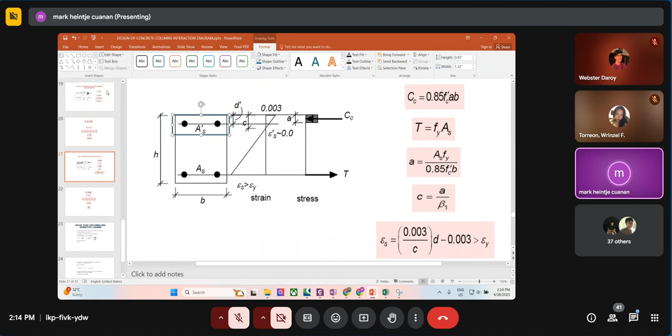So let us now proceed to the shear capacity or design for shear for our column. The design for shear in columns, this discussion will be short, because the design for shear in columns is the same as in beams.

If you analyze a beam, do you solve for the Vu? The Vu you use is actually the Vu measured from the d-distance, from the maximum shear strength. If you still remember, in the shear diagram of the beam, this is the shear at the support.

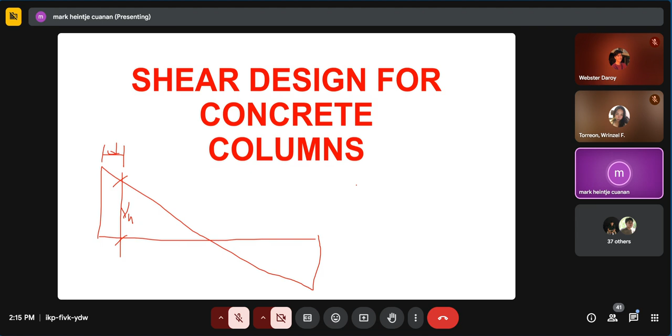So it's actually easier for columns. The same formula applies: the shear capacity Vu is simply the reduction factor times the shear provided by the concrete, plus the shear provided by our lateral reinforcement.

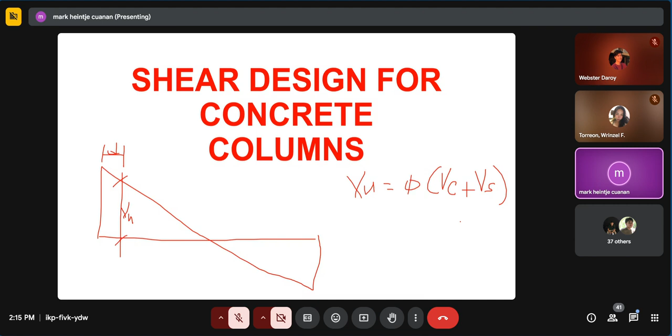So here I am going to discuss a sample problem. This is actually a sample problem from the November 2023 board exam, part of the structural engineering problem set.

A 600 by 800 column is reinforced with 16 pieces of 25 mm diameter bars, equally distributed. We have 5 reinforcements on each side of our column: 5 along this direction, and 5 along the other direction.

But notice that our lateral ties in the X direction have 4 legs - 1, 2, 3, and 4 - while in the Y direction we only have 3 legs. The lateral ties are 10 mm.

Our main reinforcement strength is 415. Lateral ties strength is 275. FC prime is 28 megapascal. Concrete cover is 40 mm.

Spacing of the ties is 150. So, what is the nominal shear strength in kilonewton of the column for shear parallel to the y-axis? And what is the nominal shear strength of the column parallel to the x-axis? And what would be the nominal compressive load

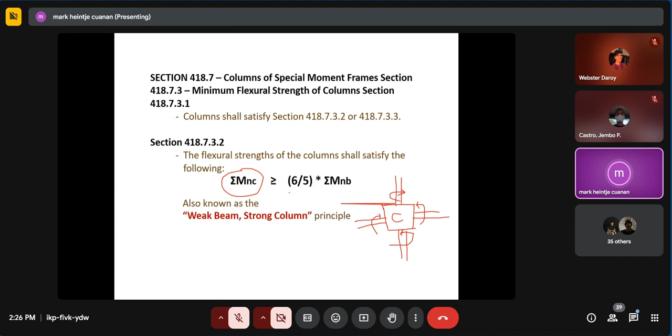Aya din ato i-design ang atong column using that particular value. So meaning dapat si column karon will handle 20% higher than the moment carried by our beam. That is based on the weak beam, strong column principle. Ang pasabot ani, dili na siya pasabot nga weak beam ang atong beam. Isa na magyapon nato ang beam mga dili siya mag-fail.

Ang pasabot ani nila is that dapat mas strong nato ang column compared to the capacity of our beam. Kay kung ang beam man gud ang mag-fail, for example itong beam na to mag-fail, itong part dito, ito yung magko-collapse. Or kung mo niya mag-fail, itong part na to mo niya mag-collapse. Pero pag ang column gani ang mag-fail, all of this portion of the building will collapse.

So we need to design the column in such a way that it can handle 20% more than what is being carried by the beams connected to that particular column. I hope that is understood.

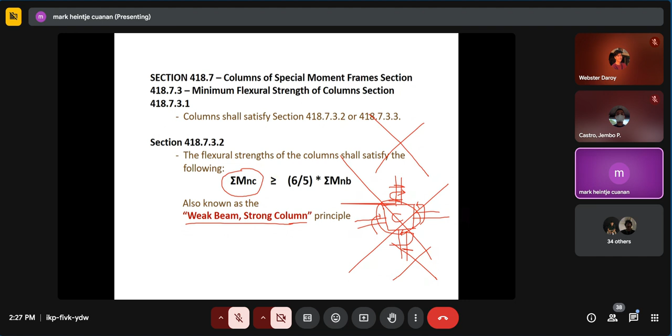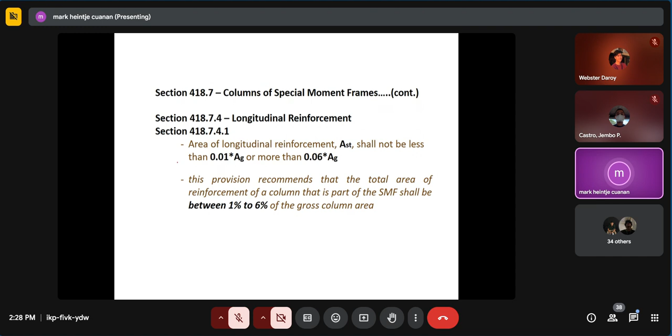Now, if you notice here in the strength requirement, ang atuang steel ratio is ranging from 1 to 8%. Pero sa seismic detailing na section 418, 1 to 6% na lang. So instead of using 8%, you use 6% as your criteria, kay in our design we are going to incorporate man sa atong seismic detailing. So 6% na lang to imong gamiton to check whether the steel reinforcement are within the limits.

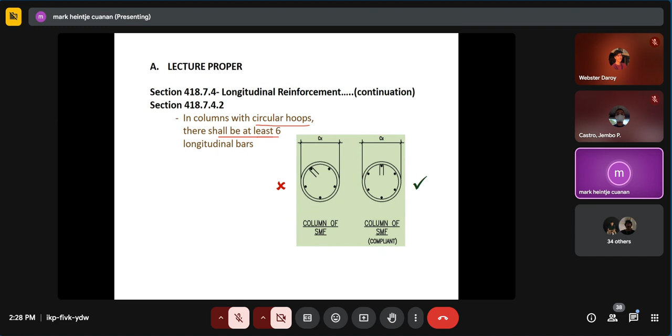Now, kung sa strength requirement nga nag-ingon dito pag spiral na ko nga tuwang lateral ties, nata minimum nga reinforcement or vertical reinforcement nga 6, for spiral. Pero sa seismic detailing requirement, regardless if it is spiral or not, basta circular siya, circular hoops, pag circular siya, it should be at least 6. You should provide at least 6 longitudinal bars. So mo na ang iyahang kalainan.

With regards naman sa mga lap splices, yung lap splices naman, ito yung tagpi, dugtungan. Kung dili maigo kumbaga ang length sa tuang steel or main vertical bars, we are going to splice it, kumbaga sinumpayan niya. Yang pagsumpay dili na siya largo nga end to end, na siya lap, itong lap na to, lap splice.

Now, with regards to the column, ang atoang lap splice should be located at the center half of the member. So ang buhaton nimo, kuha kag length sa imuhang column, tungaa siya og katulo, katong center half, diha lang ka pwede mag lap splice. So meaning dili ka pwede mag lap splice near the joint, here or here. Dili ka pwede diha, bawal na siya. Critical na siya in terms of seismic effect.

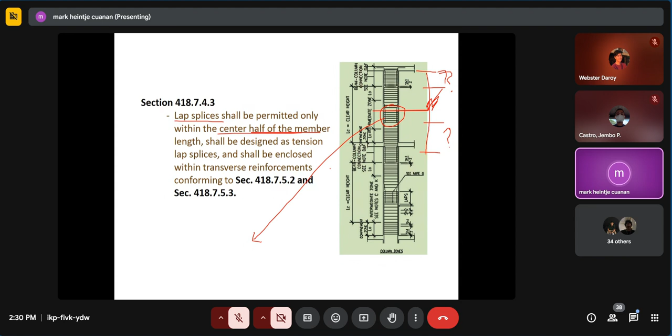So pwede ka mag lap splice didto gidapit sa tunga, wherein kana nga lap splice kung asa ka nag lap splice, kay minimum spacing sa imong reinforcement diha or sa imong lateral ties nga 100 mm. So for example ang middle nimo nga lateral ties is 150, yung spacing based on the calculation. Pero kay mag lap splice man ka, awa kay choice, mao gid mo gamiton nga spacing.

Okay? Kaya ang pag lap splice nato dili sad pwedeng 100% sa imong reinforcement imo siyang splice within a particular location. For example, na ako'y column unya 8 ka buok reinforcement. So, paglatag na ko sa akong reinforcement dili kaya nga isa lang one length lang akong column. So ako siyang i-lap splice. For example, this is the second floor, ito yung third floor. Dili pwede nga mag-lap splice ko kay dili man siya makaabot og third floor.

Mag-lap splice ko sa kakawalo ka buok reinforcement nako, i-lap splice nako diri sa second floor. So dili na siya pwede, bawal na siya actually. So only 50% of your main reinforcement ang pwede i-splice within one location. So meaning mag-lap splice ka diri og upat, ang katong remaining upat diri nimo i-lap splice.

So meaning naka-advance na ka dapat daan sa imong paglatag sa imong reinforcement. Nga, for example, diri sa ground floor, putlo nimo daan dito. Lap splice ka dito, 50% of your reinforcement lap splice here, another 50 naman lap splice here. So ang tawag na niya staggered lap splicing. Ang purpose na niya kay ma-weak dia, magsumpay ka weak dia na. It will become a weak link sa imong main reinforcement. So para dili kayo na siya weak, 50% lang ang gi-allowed nga imong i-lap splice.

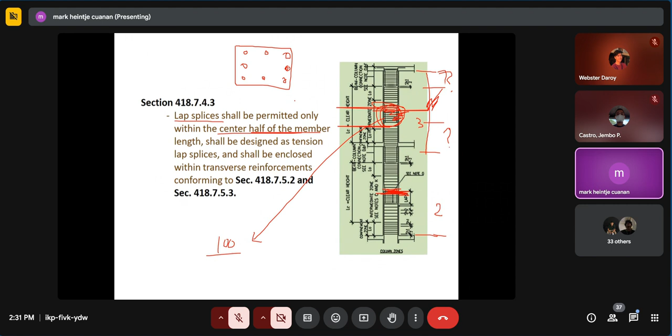With regards to our lateral ties, the stirrups in our column, we need to provide hoops, wherein the length of our hoop should be marked as L sub O. For example, our beam and column, we need to provide a hoop.

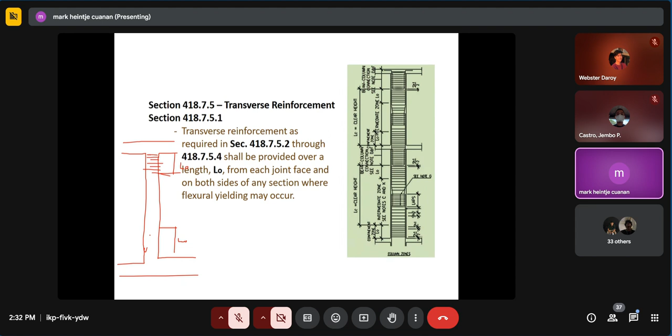Within a length of L sub O, both ends of your column, that's where our hoop or lateral ties are part of. So what would be the length of our L sub O?

It would be the largest among the following. Number 1, the longest dimension of your column, or H - of course it's the H, the longest dimension of your column.

So if we have a 400 by 500 column, the governing value would be the 500 or 0.5. Or clear distance over 6.

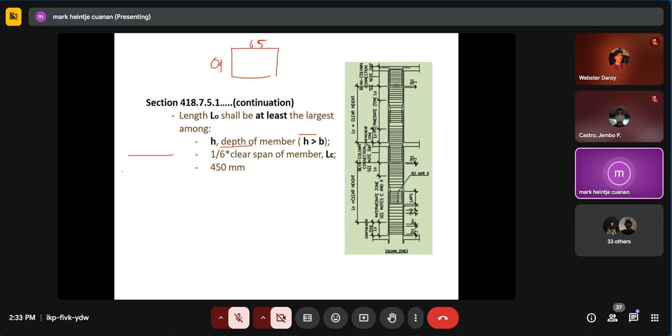For example, in the column joint, the clear distance measured from end to end of our beam, this is the L sub C. Divide this by 6, this governs, or 450, whichever is larger becomes the length of our L sub O, or our hoop.

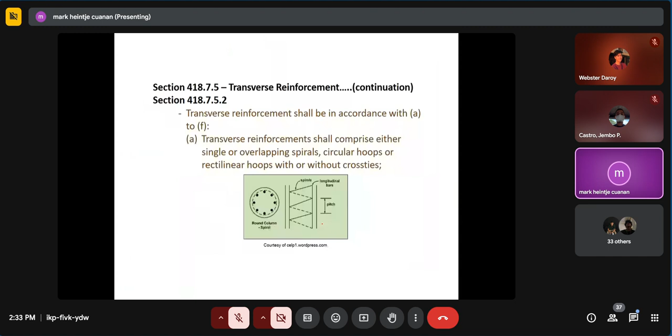Now, the spacing of our transverse reinforcement within the hoop should be the smallest of the following: 1/4 of the minimum column dimension.

For example, with a 400 by 500 column, minimum column dimension is 400 divided by 4, that's 100. Or 6 times the smallest longitudinal bar.

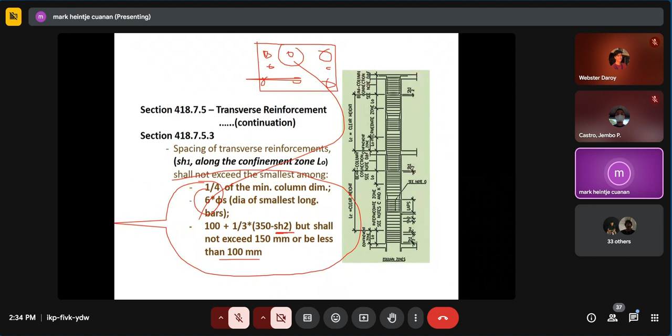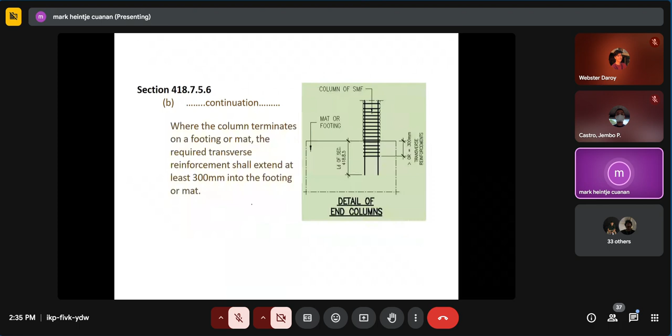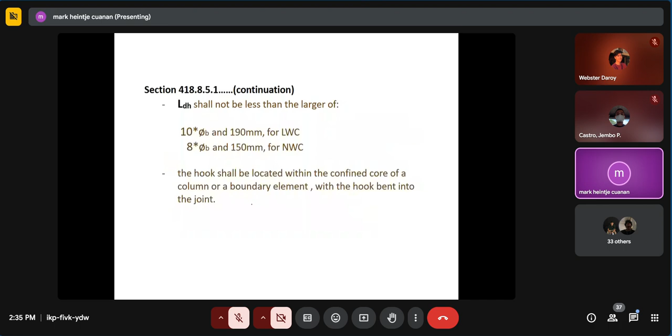Beyond the hoop, or beyond the L sub O, the spacing there - beyond the length of LO or beyond the hoop, the spacing shall not exceed the smaller of 6 times the smallest longitudinal bar or 150.

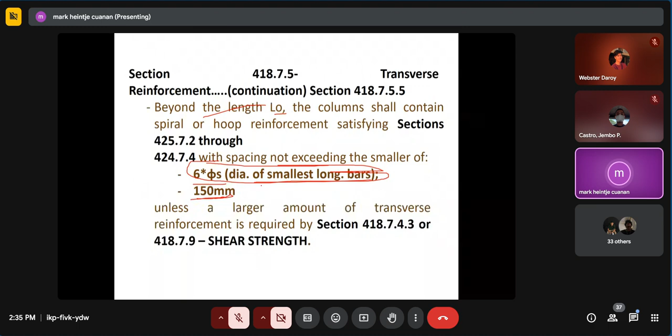But usually, in my case, I don't use this because it's too dense, too dense a spacing. Usually I just use 150. So, any questions or clarifications so far? Let's focus here - main seismic detailing, main reinforcement and seismic detailing for our lateral ties.